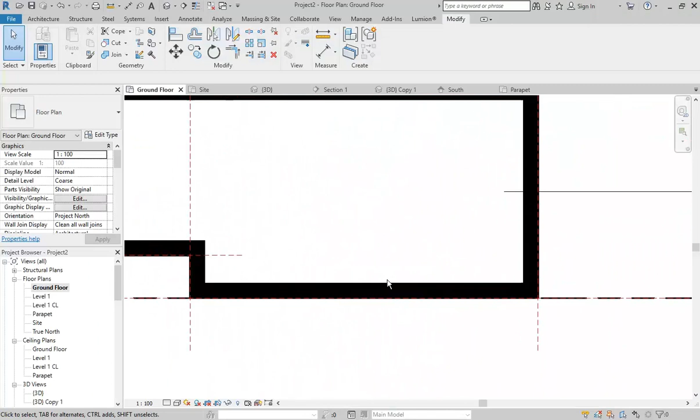Okay, so we've got these walls which give us the outline of the building, but now that we know that the passageway can be retained between the buildings, and so here you can see how it used to be where there was something over it, and yeah, it's all been opened up a bit more now, which is nice. And so what that means is that firstly, we can treat this wall as a party wall, which it would be almost definitely in reality.

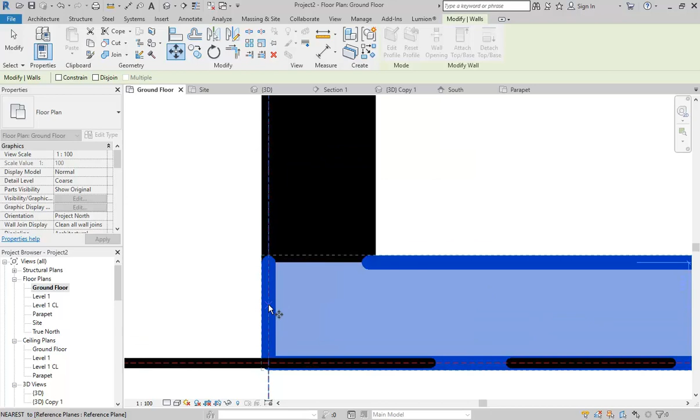So to make it as though it's a party wall, I'm simply going to select it and then click the move button, and then see if I can find the midpoint at the end there, but sometimes it won't snap to that. You can see it's not picking up the triangle, which tells us it's the midpoint, but we know the thickness of this wall, it's 250. So I'm simply going to click a base point anywhere, and then move the cursor down in the direction I want it to go and type 125.

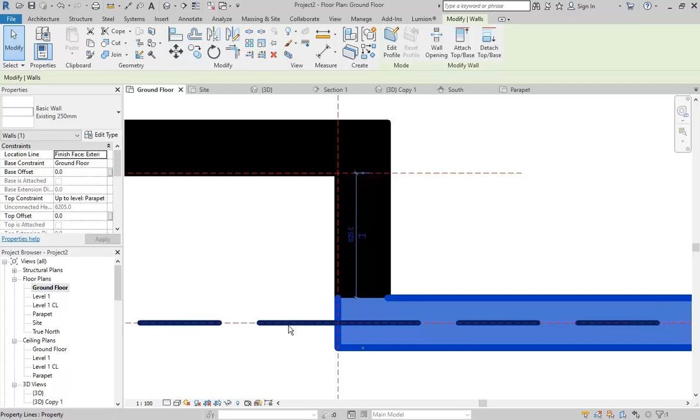So that should now be centred exactly over the boundary. There are other ways of aligning it. You could use the align tool to do that as well, but that method works. Or you could do the maths. I mean, there are lots of ways.

So, okay, I've got my wall in the right position, and now I want to make a wall that's going to create our passageway, just using the same wall type, so using the wall tool. It's still got the wall type I made earlier, and I'm going to then simply change the height of that wall to level 1, so it's going to finish at level 1.

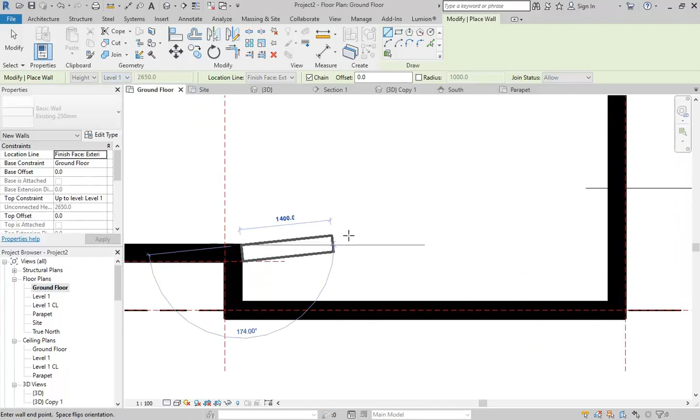And I'm going to start on the corner there and take that over to the right to that rear wall. It doesn't matter if you work on the top of the ground floor, if you do want to change the height. Oh yeah, so it starts on ground floor and then the top is level 1, but the base is ground floor. Yeah, so it always picks that up from the floor level that you're drawing on.

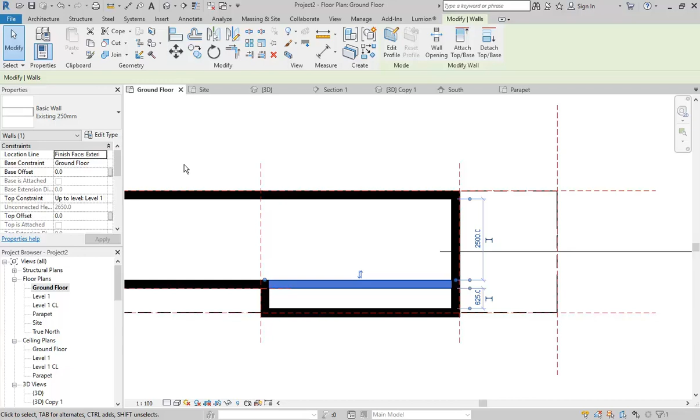So that outer wall does have to be moved. Yeah, it should be, especially if you're going to do the passageway, because otherwise the passageway would be too narrow. I mean, even now it's still pretty narrow. But look, I've got a place where we've got a 700 passage and it works. Yeah, so 625 is pretty narrow, but with this building, I think you don't want to make it any wider than that because you're so pushed for space anyway.

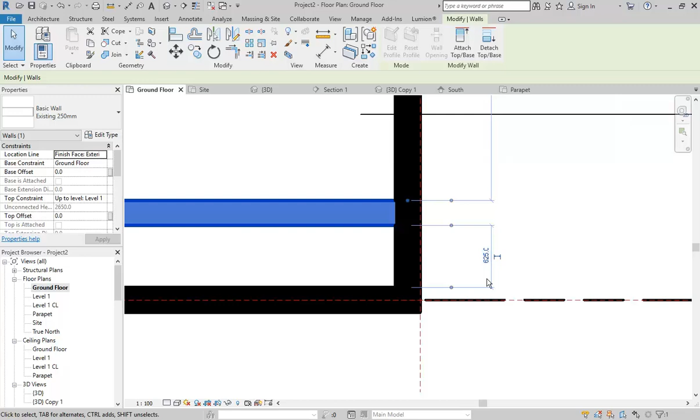And you can get them down narrower. I've actually had an old place where it was a bit narrower than the one I've got now, and we had to buy special wheelbarrows and things to get down this. It was about 550 or something. But you can get wheelbarrows that'll fit down there, and you could walk down through it. So it works, 625, I think that's okay.

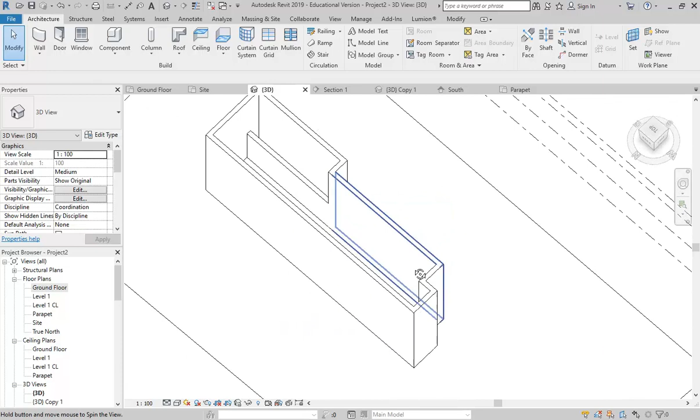And so then looking at it in 3D will give you a better idea how it's all working together. We've got that one wall that's lower, and then the rest is still at the full height.

Now, I know you'd be tempted to get this wall and give it the bottom constraint on level 1, but I'm not going to do that. Because if you look at the way it's built, that wall would actually continue all the way down to the ground, and it would be belonging to the neighbours. So you don't need to bring that wall up. You can if you want to, but I don't think it's really necessary.

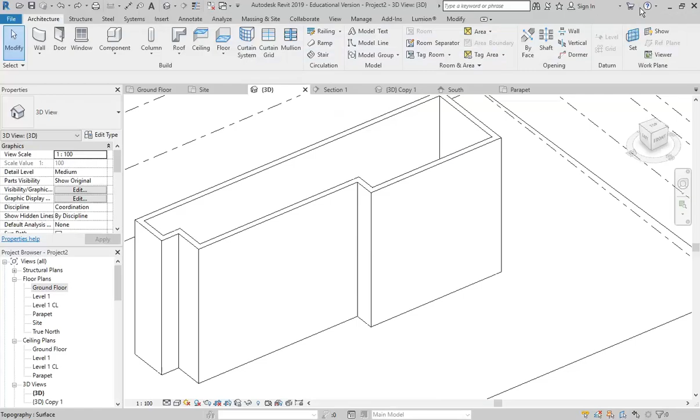And then the other one you'd be tempted to bring up is this one. You'd be tempted to bring that up the same way to start on level 1. And then you can, of course, see the passageway. And that's maybe not a terrible option, but the better way of doing it is to leave it at that point, and then it gives me a chance to show you this really good option that you have with walls, with any wall, and that's to use this Edit Profile option. So with Edit Profile, you can essentially change the shape of any wall in elevation.

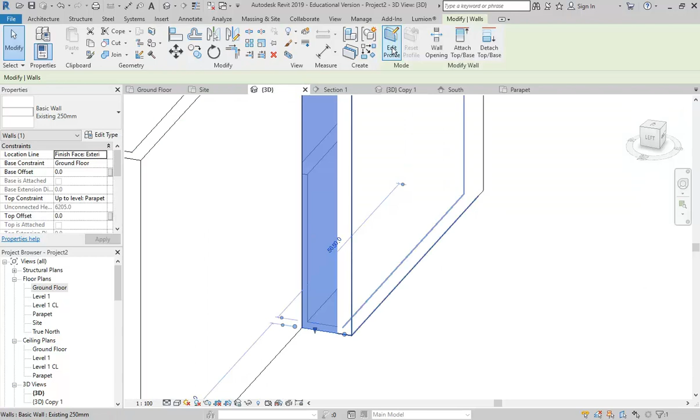So when you've got a wall selected, if you click Edit Profile, you'll see you get the elevation shape, which is generally a rectangle. And now I can use some great options like pick lines, and I'm going to pick the inside of this wall and the inside of the other wall, so I know where those edges line up with the wall that I'm working on.

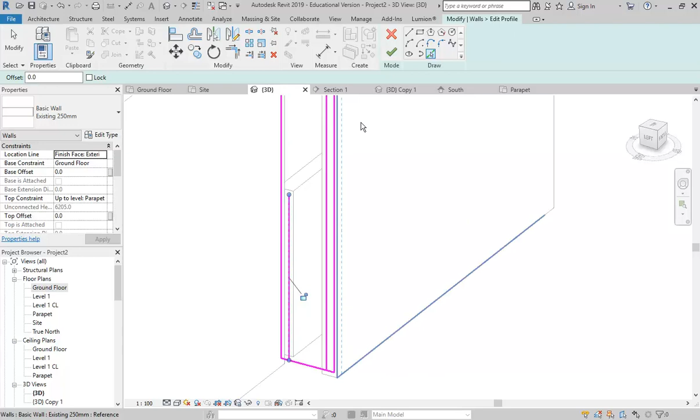And then I'm simply going to go and draw an arc in between those two lines. I'm not going to be too fussy about where I start that, I can always move it up or down later. So that gives me a nice little archway, which is the typical way you have these connecting passages that go under another story.

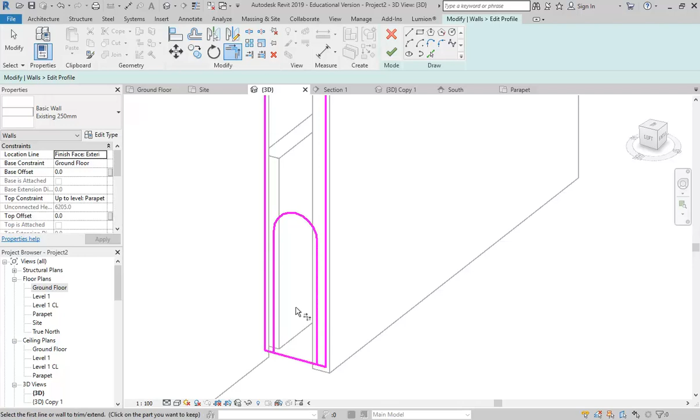And then using trim to corner, I can join those all back together. And then I'll use split and break that bottom line, so I can then trim either side of that to get my bottoms. And there we are. Tick to finish.

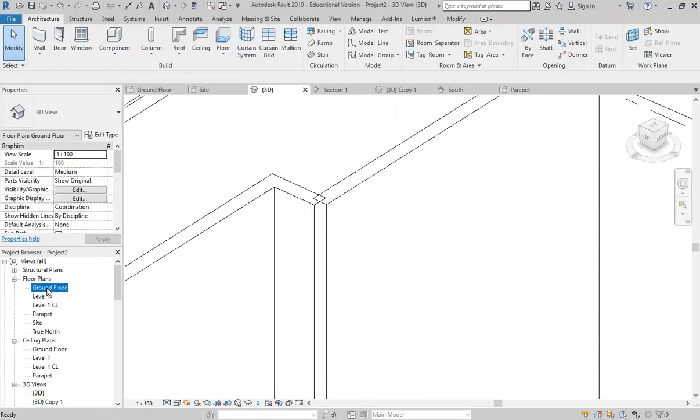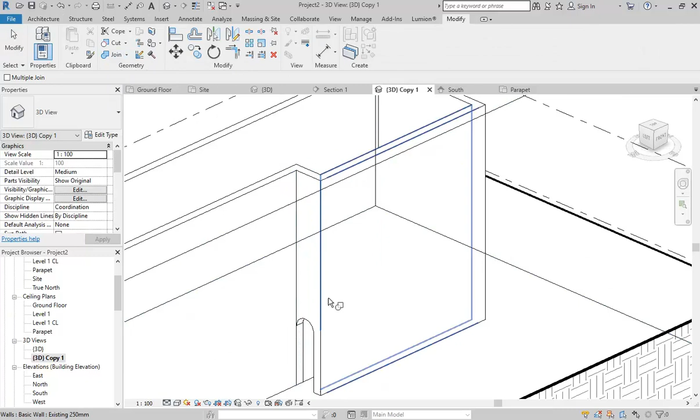And then if it gives you a message about joining, that's fine. I'm going to hit unjoin elements, and now it's messed up this automatic join on the corner, but I'll show you how to fix that back in the plan view. You simply select this wall that has the issue, manually stretch it to the end. That should fix it anyway, but in fact the automatic join should be back to working again. But if it's still got the edge there, you can also use the join tool after that just to tidy it up even further.

But that's fine for now, so I've got my nice little passage there. I'm going to change it, so at some point I'll probably make that some sort of internal space. But for now I'll leave it like that.

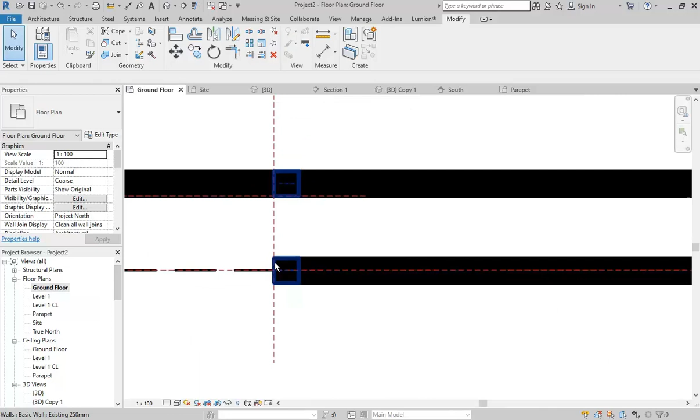And so then what we've got to think about next is the floors and how those floors and the floor construction relates to the walls now. So back on the architecture tab, using the floor tool, notice I've got the ground floor plan open.

With the floor tool, it'll go to the pick walls tool automatically, and I'm going to make it the way these old buildings tend to be, which is, even though it's a slab on the ground, they generally would have the floor structure inside the walls. Normally these days, if it's a slab on ground, the floor supports the walls entirely, so the floor would go under the walls. But again, because it's an older building, we'd assume that the floors sit inside the walls and the walls have their own footings.

So again, it's just good to understand the construction a little bit, and that can tell you how to make the floor. And in this case, we simply would pick the inside of all of these walls.

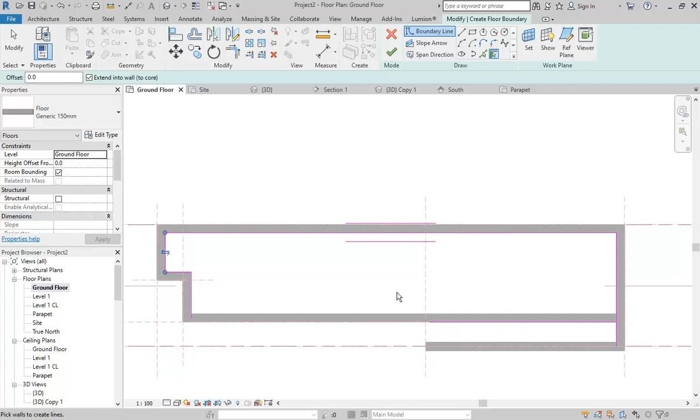Trim to corner. Oh, now, one little thing, this one's gone to the wrong side. No big deal, I can select it and flip it. And then the rest I'll be able to join together now with trim.

So that's the internal floor we've got for the ground floor. And then I'll finish it, and we'll have a look at that in a minute in section. But I'm going to go to level 1 now, and we've of course got a different floor shape there, so I'll use the floor tool again and pick the inside of all of these walls as well.

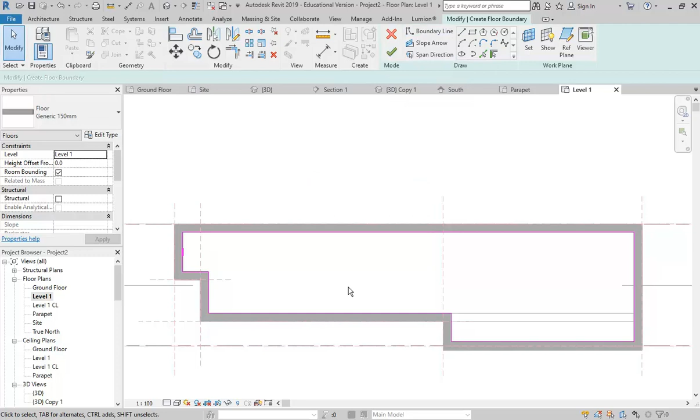Trying just to pick each edge once. If you've got walls that are split, it's better to extend them after picking them, rather than picking them all twice. So there we are, and okay, so then to see how that's all working, I'll go to a 3D view first.

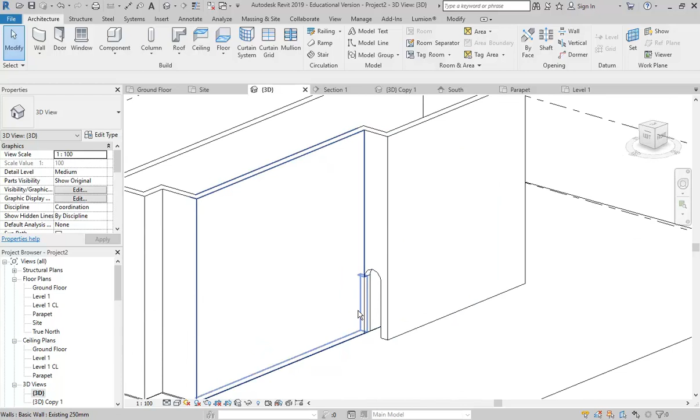And then you can see it's actually fairly tidy now because I didn't bring this wall up. Now, if I had brought the wall up, I would need to stretch it down to cover the floor, but you can see that is actually happening now with the lower floor.

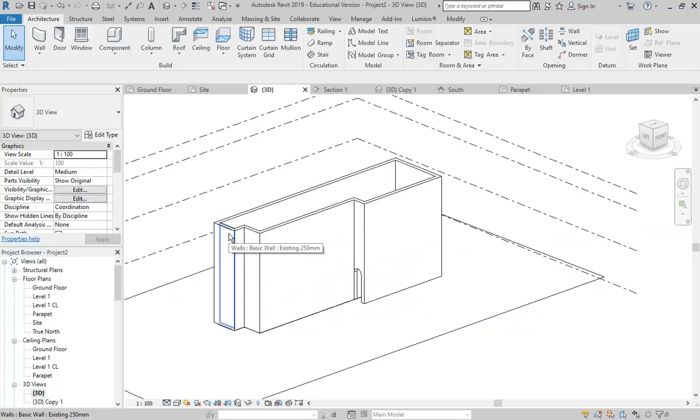And again, it makes you think about all the things that the builders often have to work out on site, because in the old days where you were doing hand drawing and only picking out the parts that you wanted to draw, often they'd avoid showing these things in their drawings, in the architectural drawings, and then the poor builders would have to sort it out. But with Revit, we're the builders, we need to make it right in 3D as well.

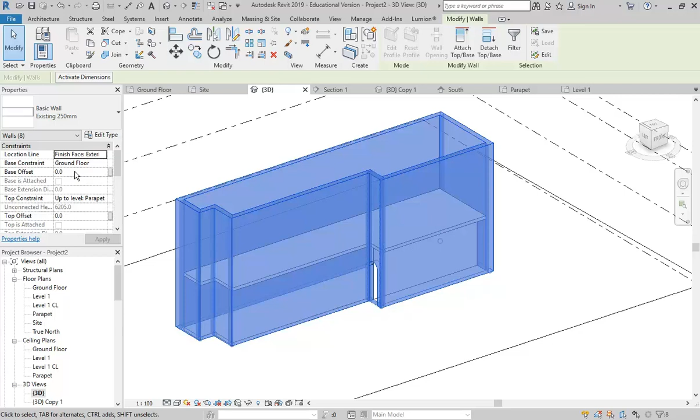So here, just to show you, I've selected all the walls using tab to get all of those outer walls highlighted. And now in properties, I'm simply going to change the base offset to -150. So that way my walls are brought down to sit nicely on the ground.

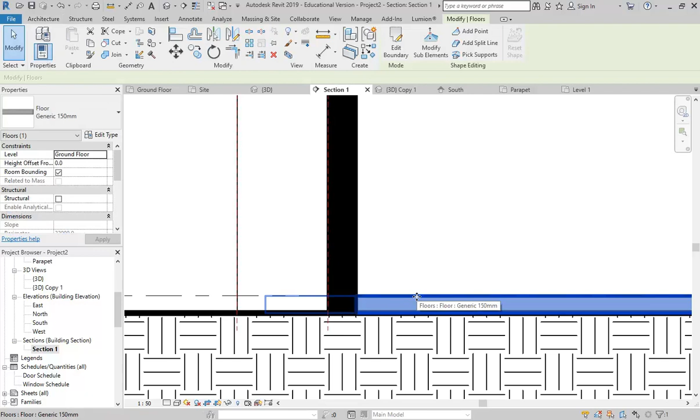And if you look at that now in section, you'll see that. Right, so the walls now, again, come down exactly to the ground level. And then the floor sits inside that set up 150, because that ground floor level is 150 above the ground.

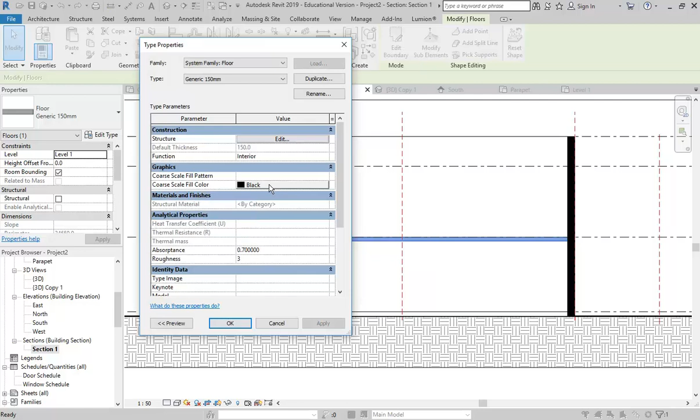So that's going to give us a nice section. One little thing I'll show you: we want the floors to show with the same colour as the walls, black. So I'm just going to select one of those floors, go to Edit Type, and you can see it's actually got the coarse scale fill colour already set to black, but there's no pattern. So just choose it there, and you'll find solid is the first one in the list.

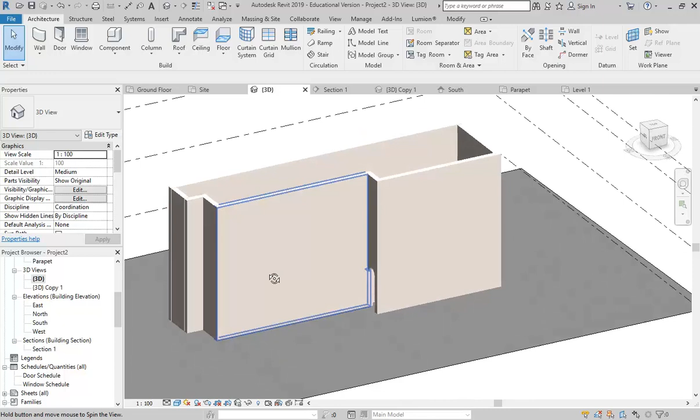And then both of those floors are going to change because they're both the same floor type. And there we are. So now we've got the main shell of the building done with the floors and everything, and that gives you a good basis for starting to put in your design and deciding if you want to change any of those things.

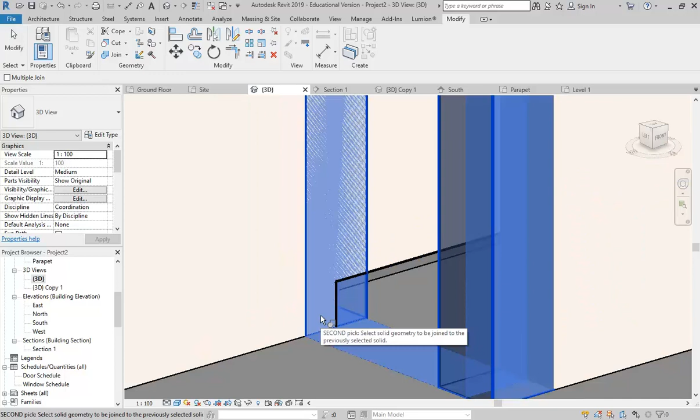Oh yeah, so there we are. There's one of those things I was talking about where the joining sometimes won't be perfect in the end, but that's where you can come back and use the join tool and pick those things to see if you can get it to tidy itself up using automatic joins. It's only a minor thing, but you can definitely get it to work in the end. If that's not working, then you'd have to use the line work tool. We'll come back to that. There are ways of hiding those lines using another tool, but we'll look at that afterwards.

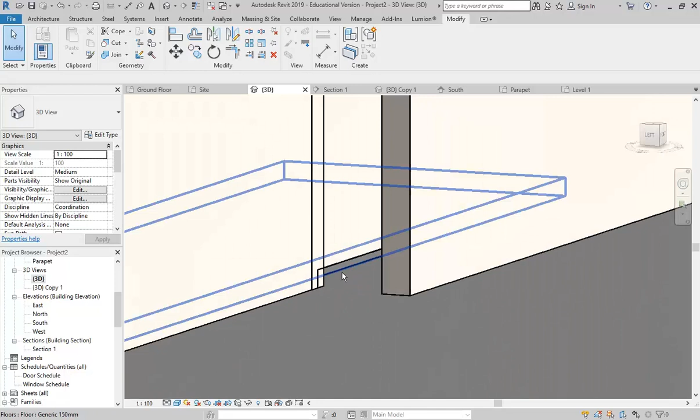Oh yeah, sorry, one thing I can do there is have a look at this wall, and yeah, it doesn't have the offset, so that's probably going to fix it anyway. That's better, and then well, that pretty much takes care of it.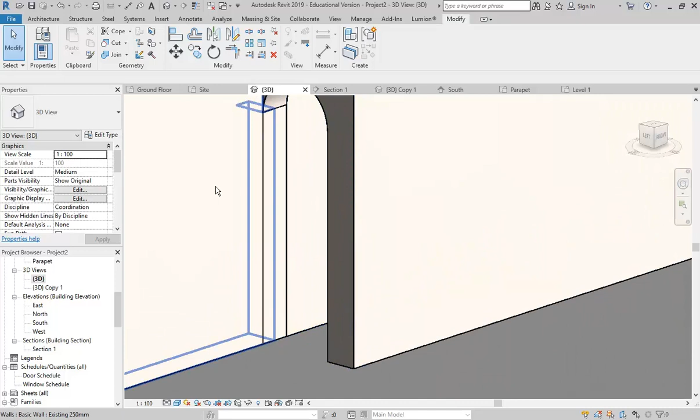If you're worried about these lines here, I will just show you the line work tool because it's a good one to know about. Up here you've got the line work button, and then you can just choose invisible lines and hide any lines that Revit's showing you that you don't need. And there we are, so nice clean join.

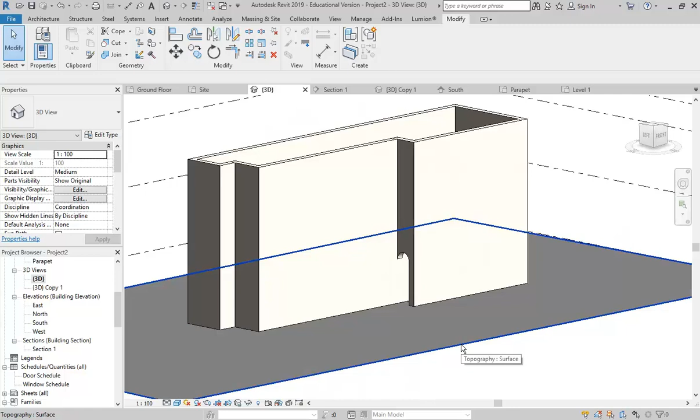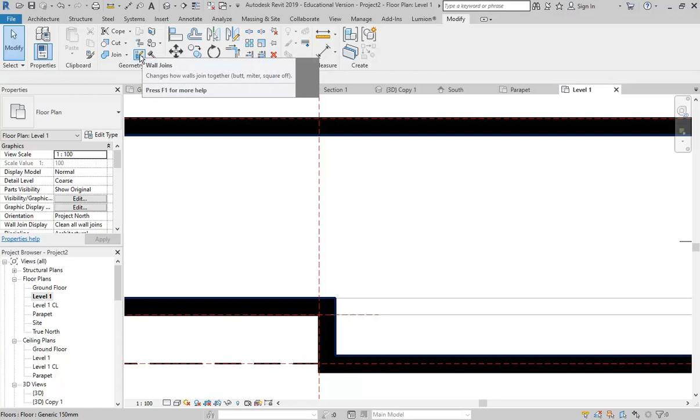That'll do it. So a few pretty advanced things in there because sometimes wall joins can get really complicated, and when we go to the different floor plans, we just want to check that everything's still joining in a nice and neat way. We'll spend more time on this later, but it's a pretty involved thing, and it makes you realise what Revit's doing for you automatically. It's got special options for joining walls, as well as the join tool and a few other options that happen without you noticing at first.

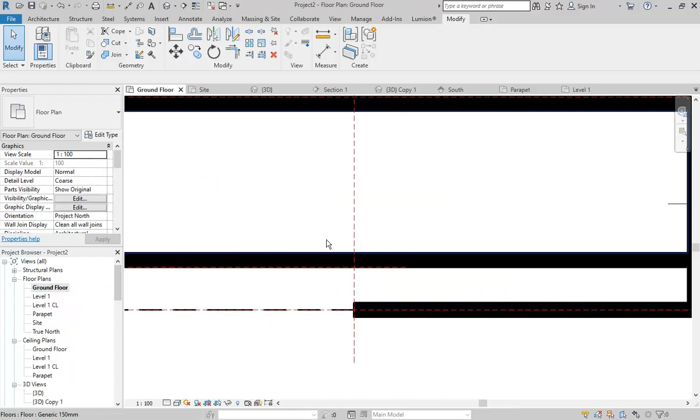But then when you need to do unusual things, you've got to customise those options. And also think about things like your floors and how they connect to walls. So again, check those in section. So the last thing I'll show you there, we've looked at the section that was there, the long section. But it's a good idea at this point to make a cross section.

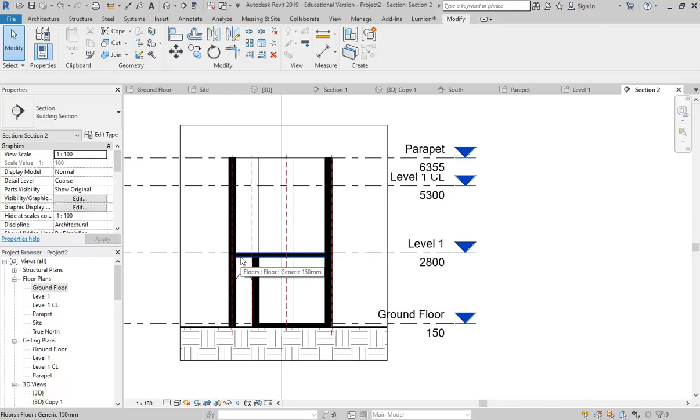So I'll flip that so it's looking towards my arch, and then go and have a look at that view, and we can see there, yeah, that's a nice neat section with everything joining fairly neatly. Again, you can customise that as much as you need to, but if you can get it working with the automatic options, that's always good.

So yeah, hopefully that'll help you, and next week we should be able to get the roofs done pretty quickly, and that's going to give you the whole building.

But even at this point, you can definitely start laying out your design, and if you're going to do that, just make sure you don't use the same big, thick, chunky wall. Of course, you're going to use thinner partitions, and again, because it's a small building, we want to get them as small as possible, and you can go down to a stud 70.

Yeah, yeah. You can go a little bit smaller with steel framing, down to about 57 mil, which is about the smallest. They might have a little bit smaller, but with 10 mil either side, that's 77, so I would say you can go to 70 though. I mean, it's pushing it, they're wobbly walls, it's not the greatest thing, so if you can do 90, that's much better.

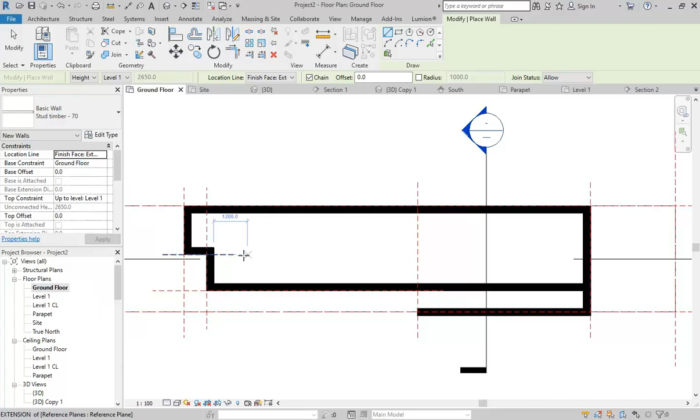But yeah, we'll say you can do... do you want a generic 100 mil? No, well, they're thicker, that's all. So stud 70, I'd say for this building, we'll say that's all right. So they're going to be nice little thin partitions. But for your interior walls, that's all right.

And notice when you draw them, they'll be coloured, which is good because you don't want them to be black. And that way, the existing walls stand out really clearly as being the black ones, and then the rest are proposed.